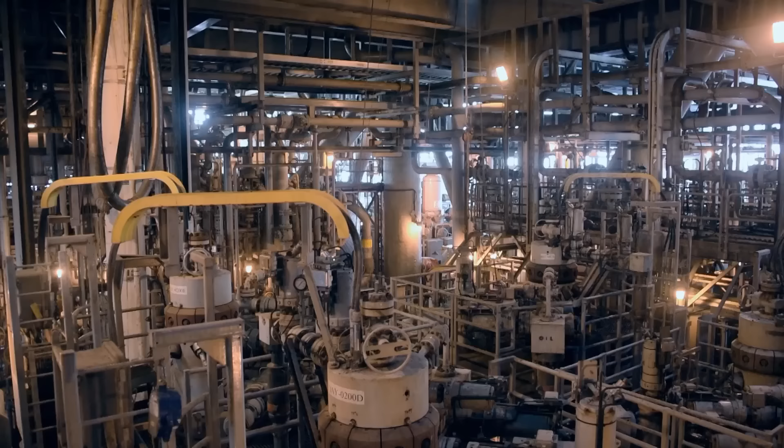In this episode, the world's deepest production and drilling platform. What we do is like the space program in the other direction. Pushing engineering frontiers further than ever before. These machines can easily work at 10,000 foot depths or greater.

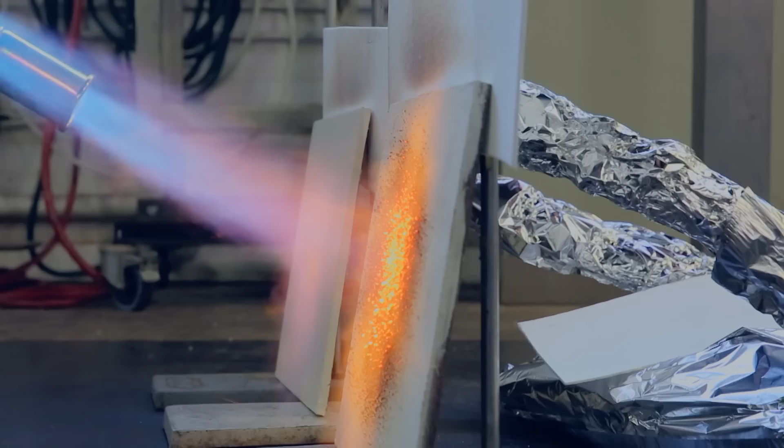And the groundbreaking innovators of the past. What once was the wall has now become the floor. So the intumescent paint now is charring due to a chemical reaction. That made the impossible possible.

Since the 1940s, the Gulf of Mexico has provided a vital source of energy for the US. Almost 2 million barrels of liquid fuel are produced there a day. And almost half of the country's entire petroleum refining capacity is on the Gulf Coast.

The importance of oil and gas in the world economy is paramount. I mean, energy makes the world go round. You know, ever since the invention of fire, that's what's driven our civilization and our economies forward. We're going to transition to whatever the fuels of the future are. In the meantime, oil and gas is a bridge to those new technologies and keeps us moving forward as a

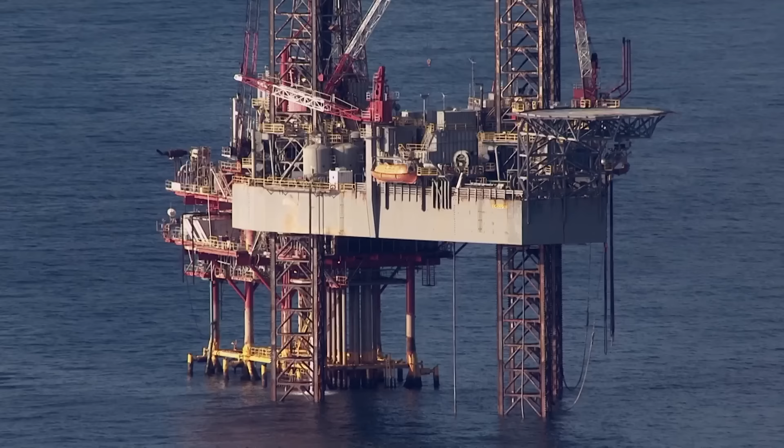human race. As the search for fuel in the Gulf of Mexico extends ever further and ever deeper, engineers face their biggest ever test. The challenge of accessing deep water reserves gets harder and harder. We're exhausting the supply or access to the easy barrels. And with every new discovery and development, it gets more challenging and it gets deeper. That's what causes us to push the frontiers of technology.

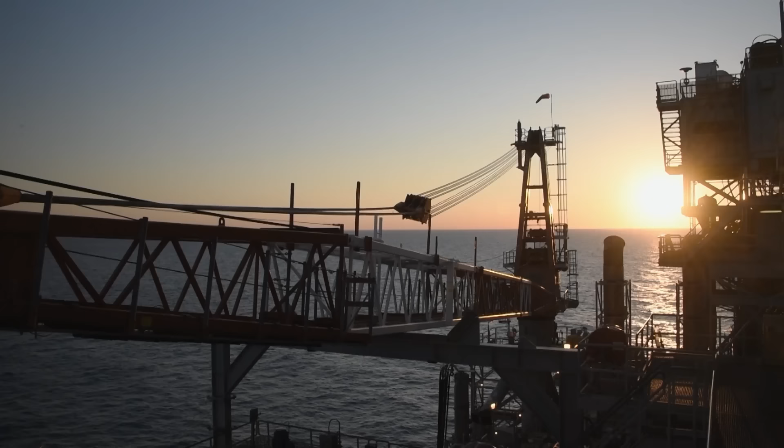300 kilometers from shore, at the vanguard of that engineering innovation, is the Perdido. The deepest production and drilling facility in the world. A $3 billion engineering colossus. The structure itself stands as tall as the Eiffel Tower, from the bottom of the Spar all the way up to the top of the drilling rig. And it's floating there in 8,000 feet of water, designed to accommodate hurricane-force winds, what we call the 1,000-year storm.

To give you a sense of how much Perdido contributes, one day's production from Perdido could power 500 cars for 15 years. At 55,000 tons, the world's largest floating production and drilling structure is anchored to the seabed by 9 3-kilometer-long steel and polyester mooring lines, where oil and gas from 35 newly discovered wells, some as far as 11 kilometers away from the platform, is pumped to the surface.

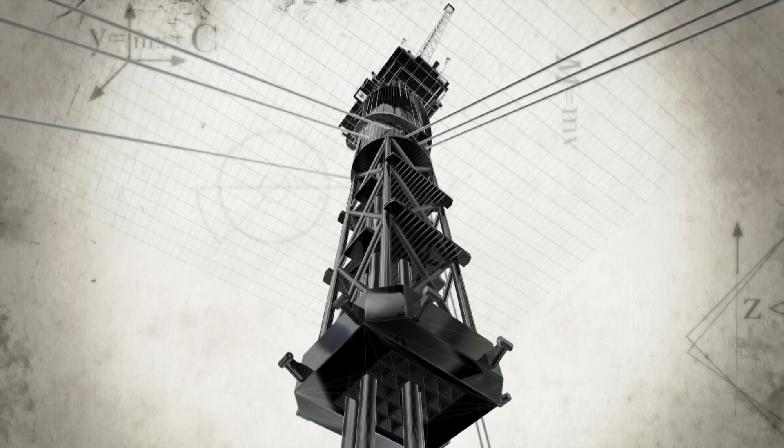A 170-meter-long, 36-meter diameter floating spar provides the base for the 3 decks where the oil and gas are processed. There's space for 2 helicopters, a restaurant, fitness room and cabins to house the crew of 150 plus that live and work on the record-breaking platform for 14 days at a time.

It's an engineering achievement once thought impossible. You were going into a frontier area in what we called the ultra-deep water. We were going in reservoirs that had not truly been tested before in new plays for the oil and gas industry in the Gulf of Mexico. You were going into one of the most severe environmental conditions as you can imagine in 7,800 feet of water. Making Perdido possible would take a giant technological leap.

Oil and gas fields wouldn't exist without the death of tiny plants and creatures. While dinosaurs roamed the earth, gazillions of dead plankton and algae built up on the seabed, before a crust of rock formed over the top. Millions of years of pressure and the Earth's heat essentially cooked this into an energy-rich soup. But getting to it under the water isn't always easy.

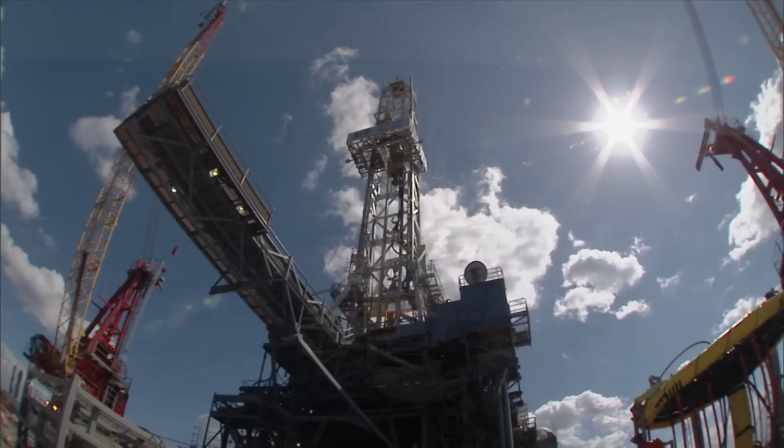Operating at a never-before-attempted almost 2,500-meter depth meant it would be impossible for Perdido to have legs like a standard oil rig. The reason we couldn't use a conventional tension leg platform was because the water depth was so great that those tension legs would be too heavy for any structure to be able to support. To find a futuristic solution, Perdido's designers would have to draw on technology pioneered in the past.

A clue to how the Perdido team have conquered the deep can be found in San Diego, California. Mechanical engineer Dan Dickerell is getting a rare opportunity to explore one of history's most unique vessels. In the early 1960s, the U.S. Navy was looking for a new type of research platform from which to take precise underwater acoustic measurements. Now, the submarines they'd been using previously were deemed unstable due to their shape. They would yaw in the water, making it impossible for the scientists on board to take the precise measurements they needed.

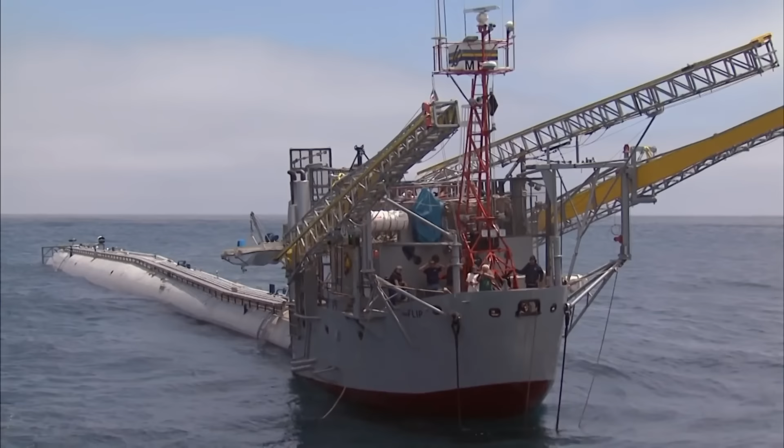Oceanographer and underwater explorer Fred Spiess was the man tasked with coming up with a solution. After months of testing various designs, Spiess and his team came up with this, the R/P FLIP, or Floating Instrument Platform. But FLIP earns its name in another quite extraordinary way. Believe it or not, FLIP is not sinking.

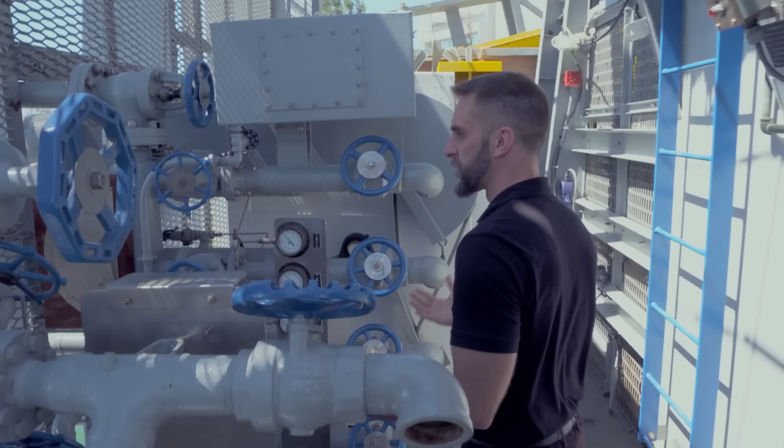It's one of a kind, a 108-meter long spar buoy that can go from horizontal to vertical in around 30 minutes. It's such a cool piece of engineering. First, the platform is towed to where it will operate. During the flip itself, everyone stands out on the outside decks. As the process occurs, the decks and the bulkheads exchange places throughout the horizontal to vertical transformation.

Most rooms on board have two doors. One for the horizontal orientation, and another door for the vertical orientation of the platform. Now, in the configuration it is right now, we're in the horizontal position. And imagine what happens when the flip occurs. What once was the wall has now become the floor. And what once was the floor has now become the wall.

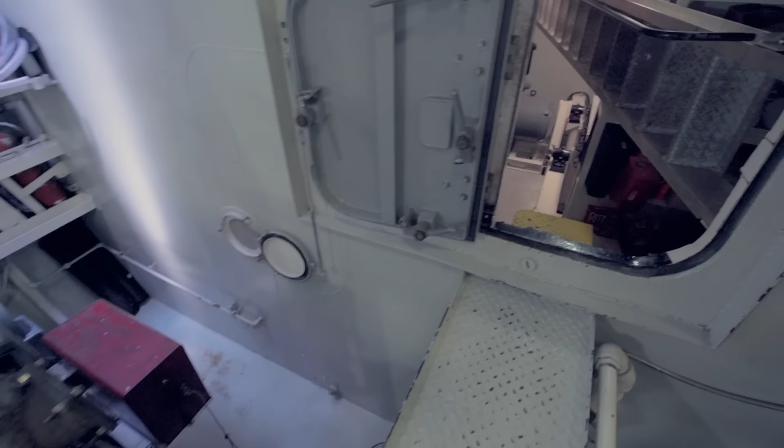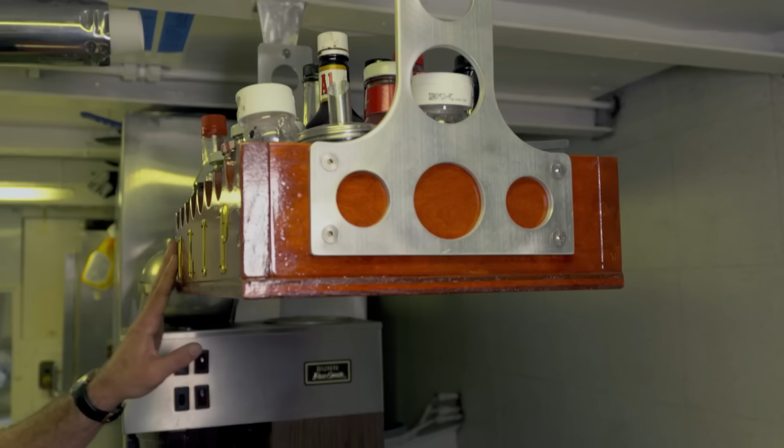Everything on the Flip is designed in two configurations. Look at this. It's a sink. It's a bathroom sink. But, oh, it pivots. How bizarre is that? From rotating condiment racks in the galley to tables on the walls.

To maintain its stable position in the horizontal, there are huge concrete blocks underneath what is now the floor. But when it's time to change and flip from horizontal to vertical, tons of seawater are pumped into those ballast chambers slowly. That changes it from horizontal to perfectly vertical. It's so cool. The science behind Flip is as simple as it gets. The genius behind how the Flip operates is its ability to sink in a controlled fashion.

Here I have a plastic bottle that's going to represent the Flip. Now, I've taped some washers at the bottom to help with stability when we make the transition from horizontal to vertical. If I place it in the water, we can see it floats in a horizontal configuration as we would expect. As I fill the bottle with water, we're going to have a transition from horizontal to vertical.

When flipped vertically, amazing stability is provided by the 700 tons of water ballast in the long spar sitting below the surface. It's so steady that Flip is capable of dealing with swells up to 25 meters high. And to rotate back to the horizontal, compressed air is simply used to force the water out, turning the platform back into a more familiar ship mode.

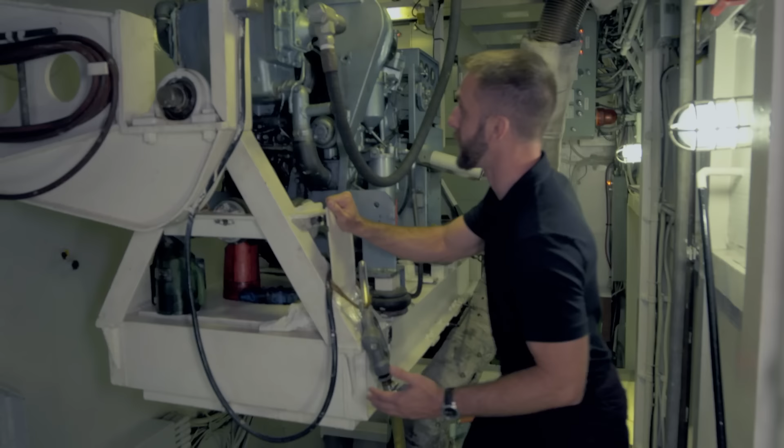These huge generators can also pivot by design. This is like being in a carnival funhouse. It's testament to the brilliant design of Fred Spiess that this amazing research vessel is still in use, more than half a century after it was launched. Oh, this platform is too crazy.

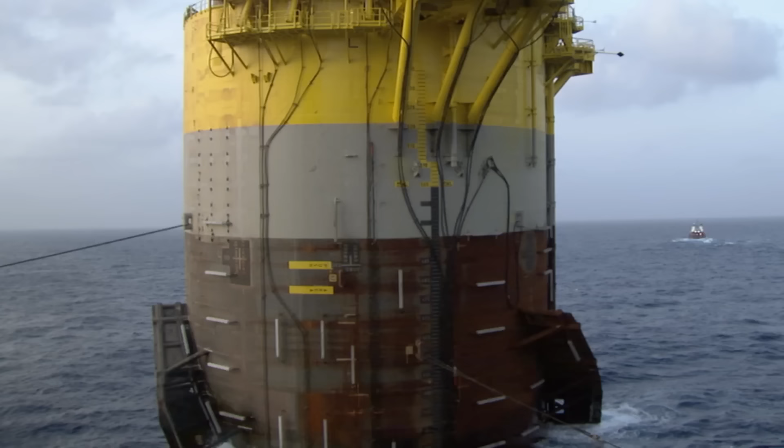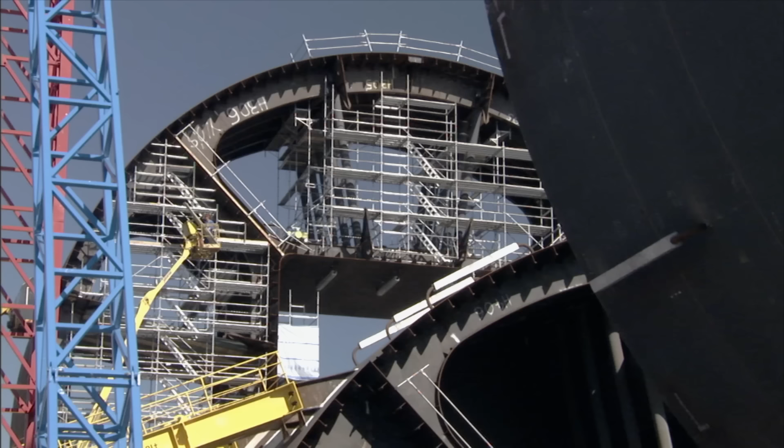In order to create a stable platform in depths of nearly 2,500 meters, Perdido's engineers take the principle behind the Flip and in 2006 in Finland, begin building the world's biggest floating spar. The spar itself is constructed quite ingeniously. It's done in slices. You cut it into slices. From the top of it, you do the can section, and then the truss section. And then it's welded together, slice by slice.

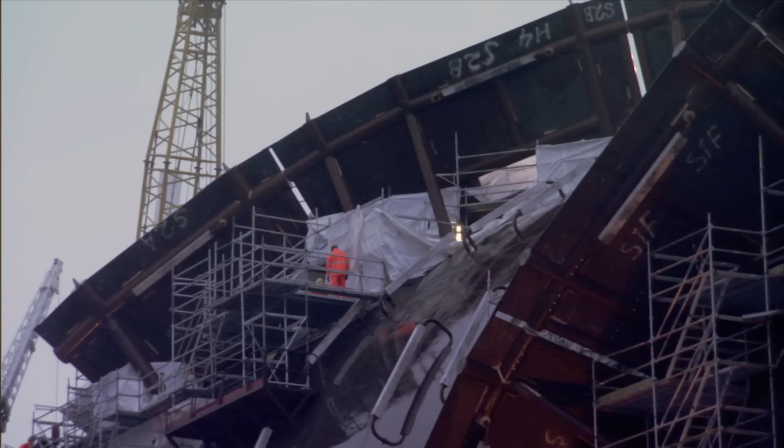Each of the 7 ring sections has 12 compartments, each self-contained. So if disaster strikes and a compartment is punctured, then only that compartment would take on water. On the end of the giant can-like section, an open truss of pipeworks and ballast area is added to complete the unprecedented structure. Perdido's spar is about 550 feet. In diameter, it's 118 feet.

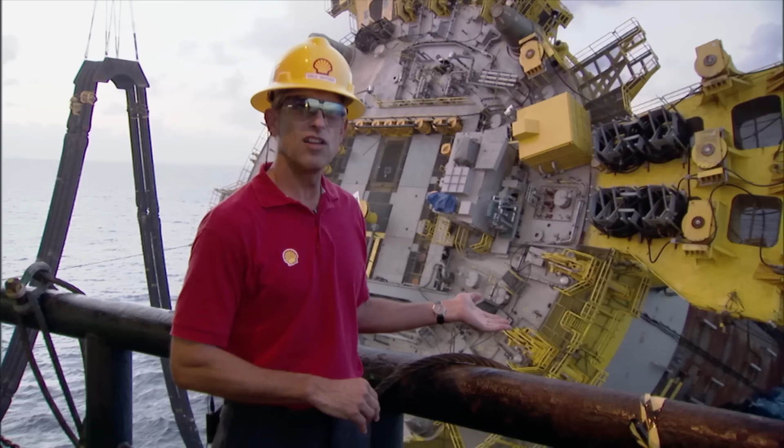In 2008, the spar is delivered to the Perdido site in the Gulf of Mexico. It's a key milestone for us because the spar is actually in its most vulnerable position when it's floating horizontally. So as soon as we can get it up to the vertical position, then it's in the position that it's designed to operate in, and it can withstand storms better.

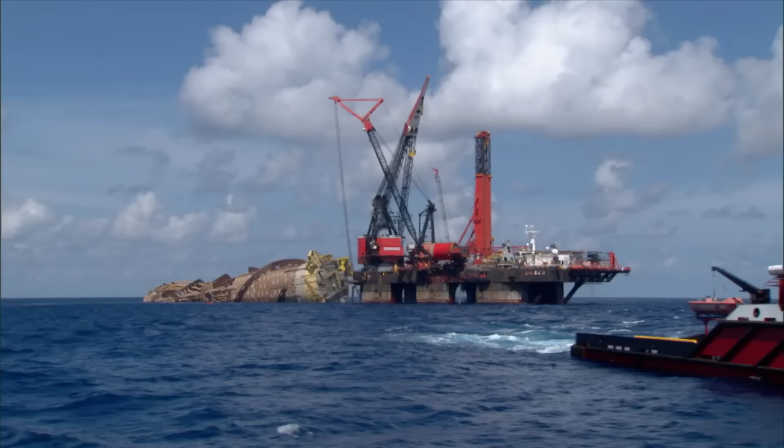Plugs are pulled to let in seawater. And then, like Fred Spiess's Flip ship, the spar slowly begins the process of switching from horizontal to vertical. So they also pump water into the tanks inside the can section, and that lowers it to give it that stability, to allow the pitch and the roll to stabilize.

Once upended, the spar must be secured, as storms or so-called tropical disturbances are on their way. We have a relatively long duration before we can get to storm safe. The first disturbance is predicted to be here within about 7 to 8 days. 9 supersized mooring lines must tether the floating spar to the seabed. A total of more than 30 kilometers of chain and rope.

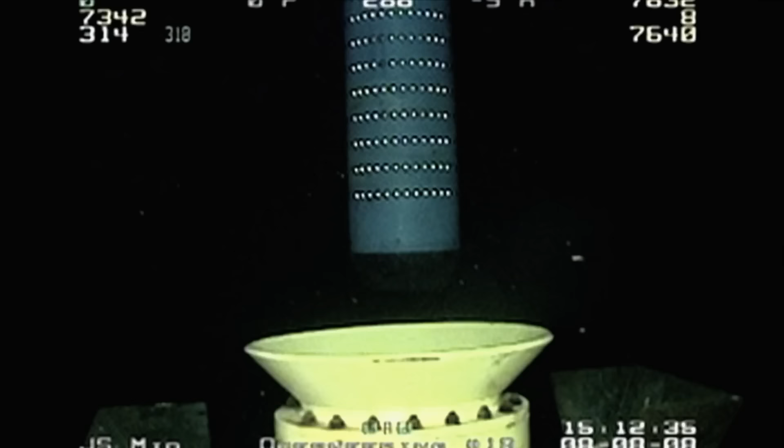So what we do in order to secure the structure floating on the surface is we connect the suction anchors on the seafloor with 2-mile-long, huge polyester mooring lines, about 25 inches thick, and about 300 meters of massive steel chains on either side of the mooring line. For maximum protection from storms, the lines fan out for more than 2.5 kilometers around the spar.

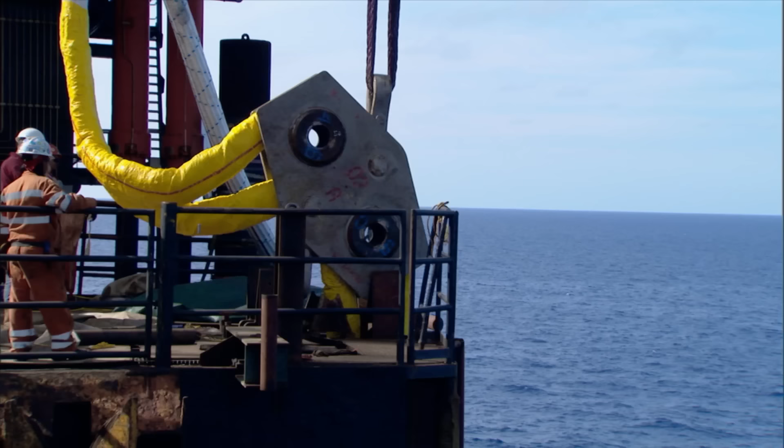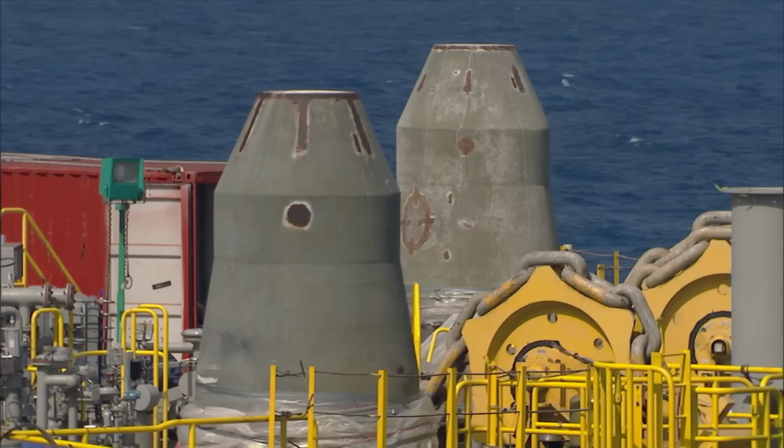Now it's still sitting pretty high in the water, so they put a weight in the bottom, essentially iron ore. They pump it into a tank at the bottom of that truss section, so you have a lot of weight at the bottom tank. With the additional weight in the mooring lines, the spar is storm safe.

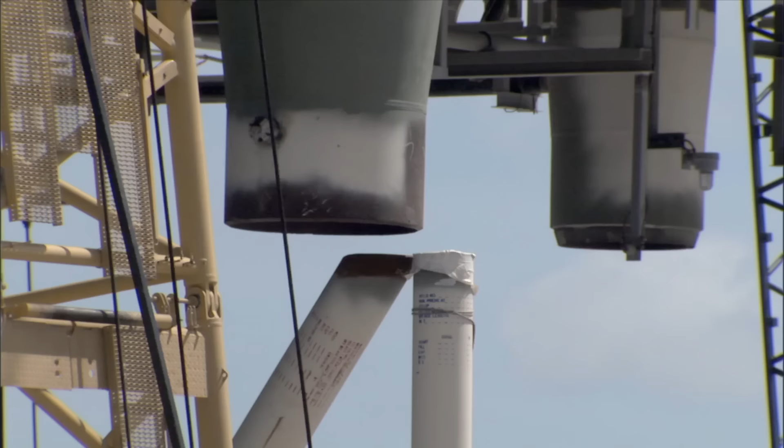But this is merely the beginning of the process of creating the world's deepest production and drilling facility. It was critical to get the topsides to be a certain weight because we wanted to do the topsides installation with a single lift. And its engineers will need to draw from more brilliant historical breakthroughs.

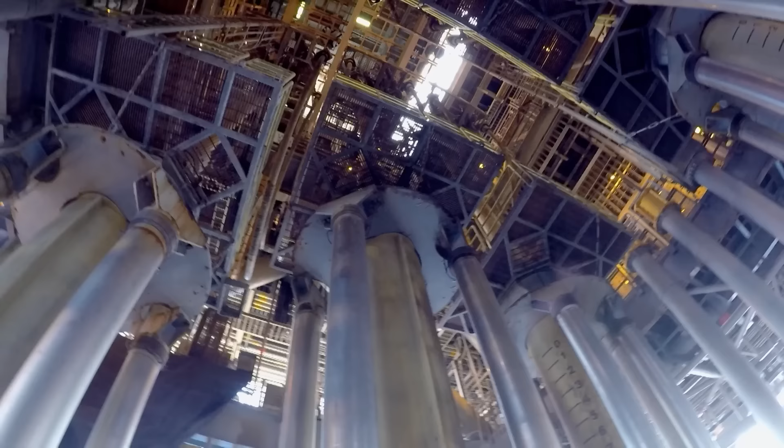300 kilometers off the Texas coastline in the Gulf of Mexico, the Perdido platform marks a new frontier in ultra-deep water operations. Moored in waters nearly 2.5 kilometers deep, the rig extracts oil from 35 wells across 3 brand new oil fields, producing 100,000 barrels of oil each day. Creating a rig like this calls for daring engineering.

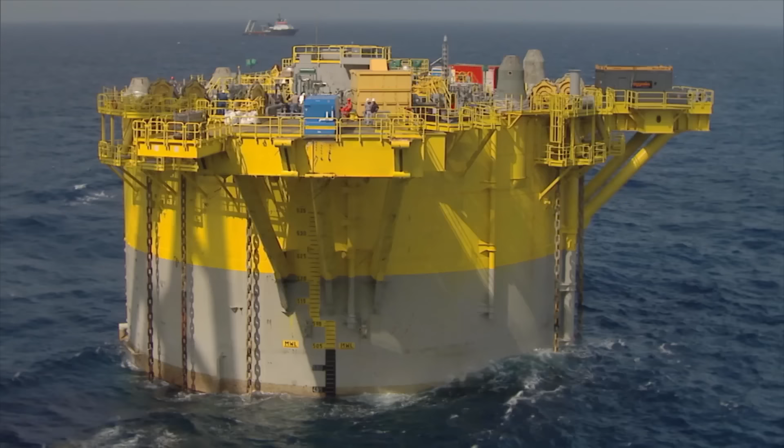Having anchored the world's biggest spar, the next step is fitting the all-important topside. What we call the topsides is all of the equipment that sits on the structure in the water that allows us to produce the oil and gas. It was critical to get the topsides to be a certain weight because we wanted to do the topsides installation with a single lift in the interest of doing it efficiently and safely.

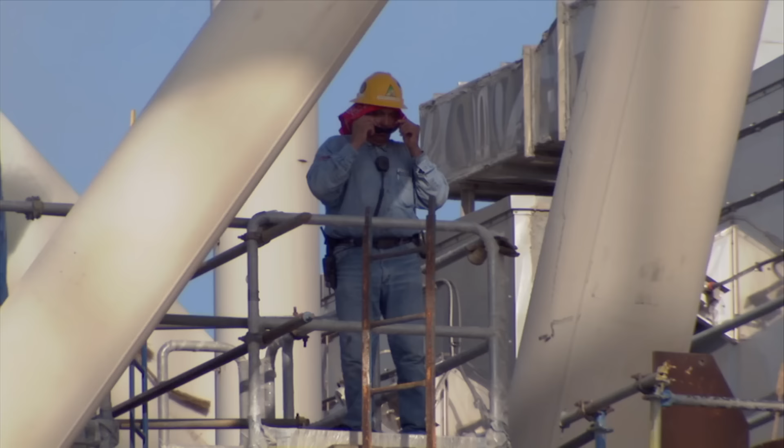Traditionally, these multi-story mega plants are assembled at sea, but a location as remote as Perdido's calls for a different solution. The topsides were constructed in Ingleside, Texas, and they were done 1 layer at a time, like a birthday cake, and there are 3 layers on the deck of Perdido. All that was done in the construction yard, and then you had a heavy lifting device that took that entire 3-deck layer and put it on a barge and shipped it offshore.

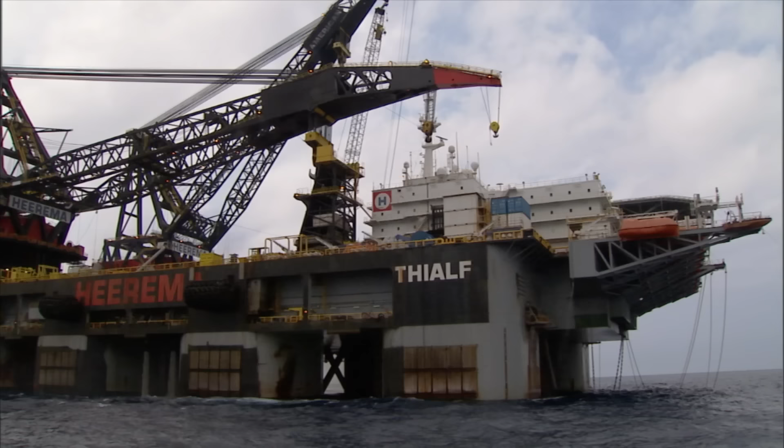With the final weight remarkably under 10,000 tons, in August 2008, the topside begins its journey deep into the Gulf of Mexico, where the giant crane vessel the Thialf is waiting to begin the biggest single lift ever attempted in the Gulf of Mexico. After 5 years of construction, this was the moment of truth, combining both spar and topside. Remember, these things are built separately, one in Finland and one in Texas, all by measurements, and all of a sudden, this is the first time these things better mate together. And there's a lot of very anxious moments as that crane is lifting that topsides onto that hull.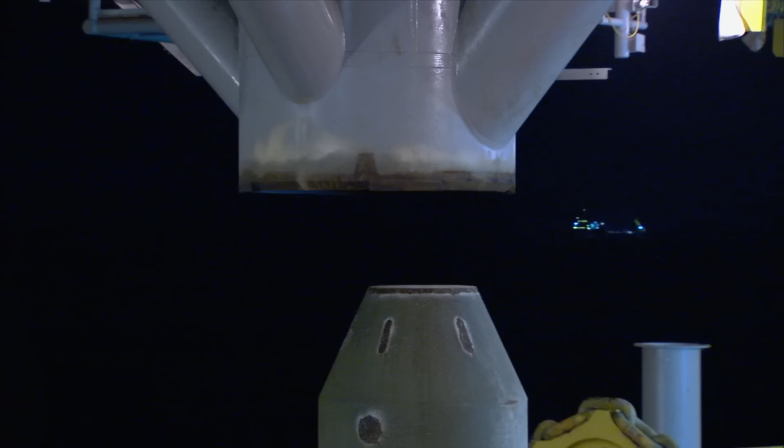As the lift begins, the topsides are pivoted into position, fitting perfectly. To see those pins go in, it's a wonderful feeling. And the spar settles into its new draft. With this mammoth milestone complete, the Perdido team must focus on installing production equipment on the seabed.

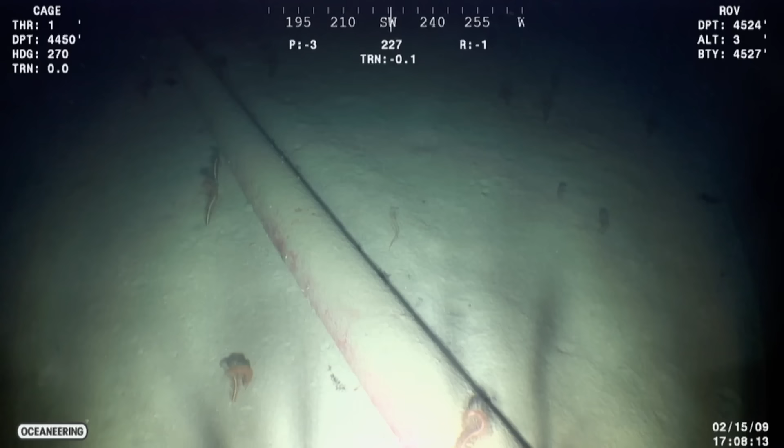But nearly 2,500 meters below the surface, with a terrain resembling a mountain range, it is a seemingly impossible working environment. The conditions at the water depth at Perdido, in 7,800 feet of water, it's an extreme amount of pressure. In addition to that, it's really, really cold down there. So you're talking temperatures in the order of 38 degrees Fahrenheit. So very, very cold, and there's no light. So it's very hostile conditions in terms of the pressure that we have down there.

With sophisticated deep-sea hardware needed on the seabed, physically interacting with it is impossible. You just can't get people down there. Yet a considerable amount of work still has to be done at these water depths. In an environment where even fish struggle to survive, how do you carry out some of the most advanced engineering work on the planet? It's a problem that requires another ingenious innovation from the past.

In the 1950s, America was at the forefront of developing nuclear power for peacetime use. Crucial to this movement was Chicago's vast Argonne National Laboratory. With special access, Professor Eric Lima has taken to 3 wheels to explore this extraordinary 1,500-acre site. It's very cool. Discovering how this era of hazardous research spawned a game-changing innovation.

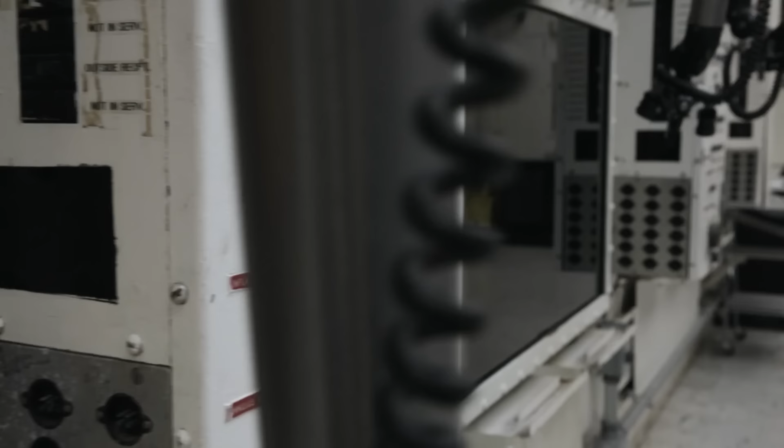This absolutely enormous laboratory was used to test the actual materials coming out of the reactors. Now, of course, those materials are highly radioactive. So how can technicians manipulate those materials without exposing themselves to radioactive contamination? That was the challenge. Toxic substances were initially handled through sealed glove boxes, but even these posed safety concerns.

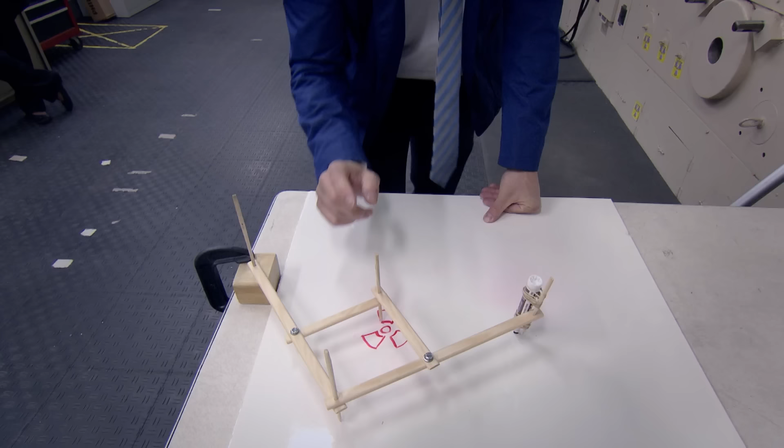To further distance scientists, engineers drew on a centuries-old technique based around a device known as a pantograph. The principle is a master-slave relationship. Now, this was developed in the 1600s, and what happens is that any movement of the master pen is transferred along the wood to the slave pen. And so you can trace diagrams, like I'm about to do with this radioactive symbol, and that tracing can actually be amplified.

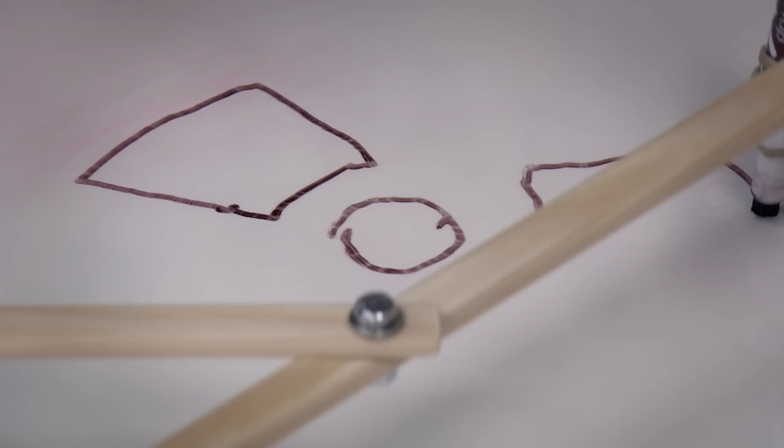And so here it is, the original and the drawing. Using this principle, early mechanical master-slave manipulators, MSMs, allowed technicians to transfer basic movements to a second arm from behind the safety of a glass wall. But their dexterity and strength was still limited.

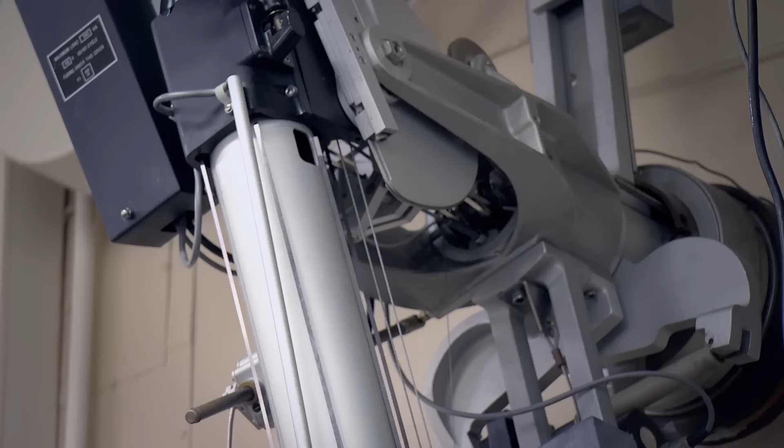In 1954, engineer Raymond Goertz looked beyond the purely mechanical, adding a motor to each arm, connected by an electric cable. And so what they would use are these incredible arms. And this is really cool. Look at this. On the other side of that glass, it does exactly what I do. And not only does it move back and forth, in and out, but check this out. Look at this. That arm right in there exactly mimics my actions. Cool.

And then it's actually a force multiplier. So I could pick up something very heavy, just like I was gripping it with my hand, and move it over. Well, look, there's another arm right there. I could use both of them. It's like right out of some cyborg thing. Whoa, it's making noises. That's the servo motors up there.

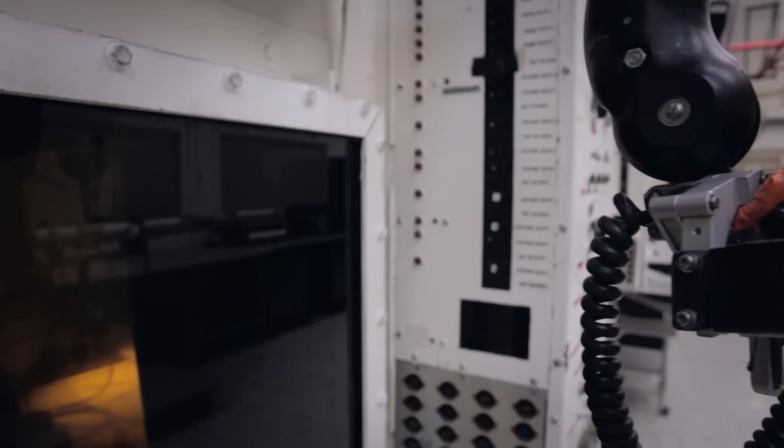The motors not only multiplied force, they also allowed the operator to feel the movements. Improved precision was matched by greater flexibility, and the electrical cable connection allowed engineers to separate the master and slave arms. Goertz was able to decouple the arms, and what that means is they can be as far apart and in any location that we want. So we could actually have the slave arm coming up from the floor or coming at some weird angle to get us right where we want it to go.

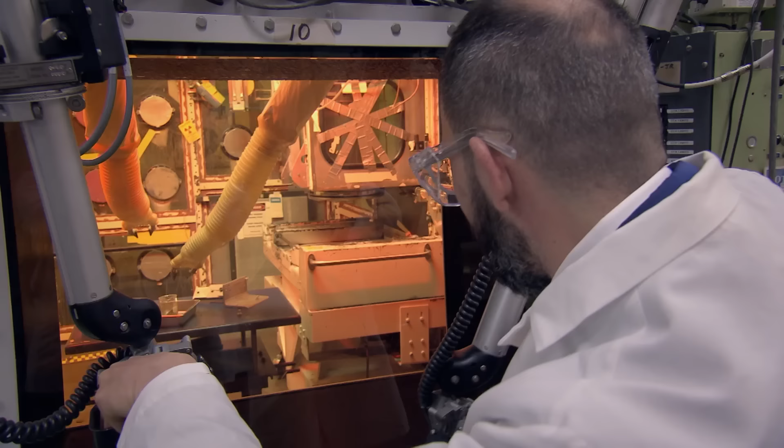Over the following decades, Goertz's remote technology was further finessed, producing a series of telemanipulators that combined safety with robotic precision. Woo! If in the right hands. Whoa! As you can see, it's not as easy as it looks. So thanks to Goertz and his work at Argonne National Laboratory developing these telemanipulators, we are able to go as humans in places that we've never been able to go before.

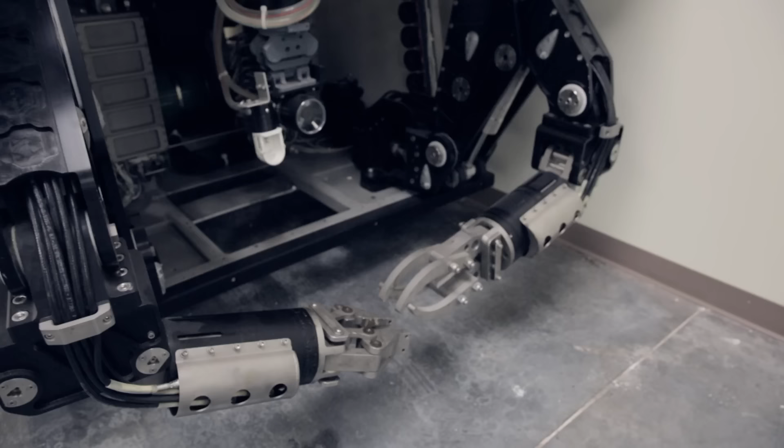Resembling a scene from a sci-fi novel, engineers at Perdido are using telemanipulator technology to work at depths that were once thought impossible. This fleet of remote-operated vehicles, or ROVs, sweep the ocean bed that lies almost 2.5 kilometers beneath the platform. This is exactly the type of ROV that we would use on Perdido. This is a 1,000-pound thrust machine, and one of the main reasons we use them is simply because below about 600-foot water depth, it gets really, really dicey, really, really risky to have humans at those depths. These machines can easily work at 10,000-foot water depths or greater, and we can always get them back, and they never get hurt.

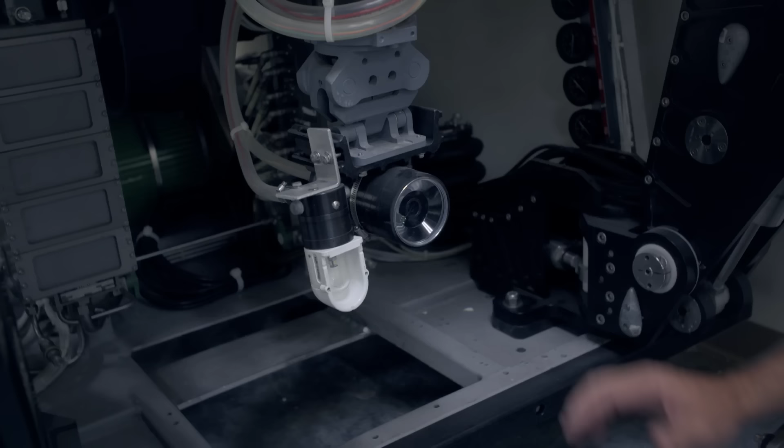These sub-aqua robots are equipped for serious work. These are our hands to actually connect and attach all the different equipment we need. And here is our eyes. This high definition camera is how we see what we have going on down there. A leap forward from Goertz's telemanipulators, these ROVs can be operated via a joystick using a fly-by-wire system that originates on board the rig.

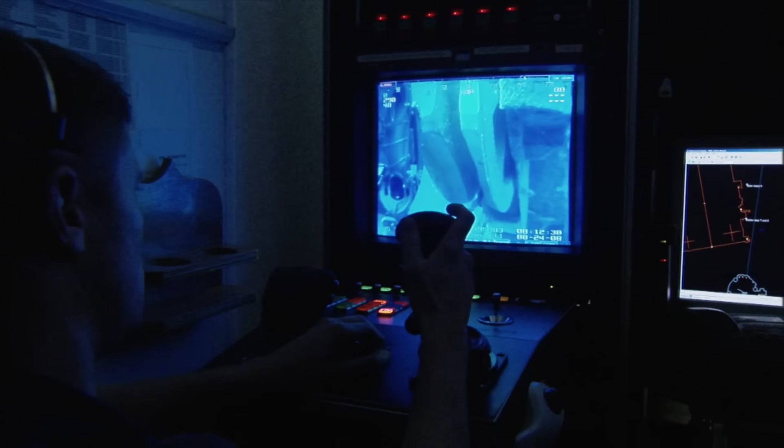The way these machines operate, they're actually tethered back to Perdido. There's actually an umbilical line that runs the entire water depth, all 7,800 feet. And from there, there's an additional 600 feet or so of umbilical that allows the ROV to fly out on excursions and move about the well pattern to go from one well to the next so they can survey the entire subsea system. Installation, drilling, and maintenance can all be achieved remotely.

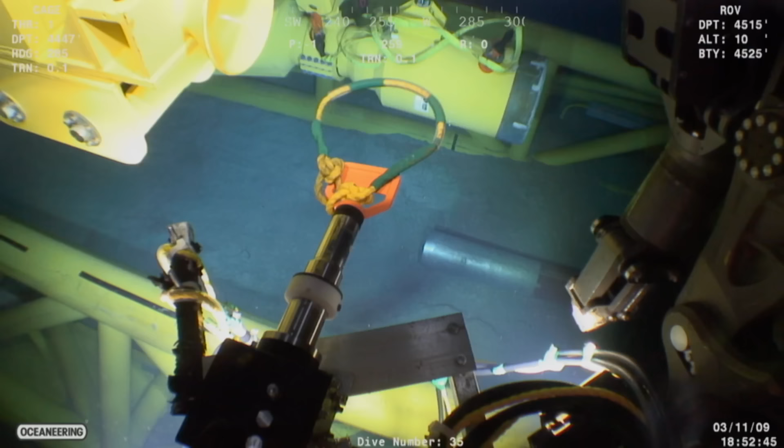But there was one ROV-driven task that would be the crowning glory of Perdido's success. So you're 150 miles offshore of the coast of Texas, and you had to get that oil and gas back to the beach. Most of the oil pipelines that you have in the Gulf of Mexico start in less than 5,000 feet of water depth. So we had to connect from Perdido's location to oil pipelines and gas pipelines that are further up in the shallower water.

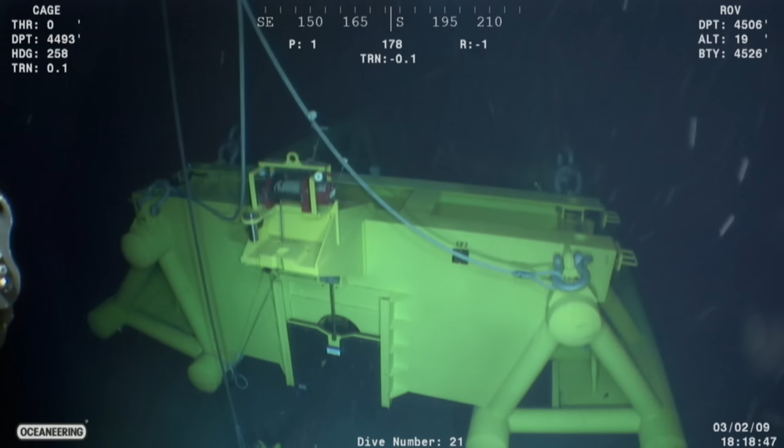Connecting to a live export line at these depths had never been attempted. The pipe must be cut and connector installed with millimeter precision. And at nearly 1,500 meters, it was completely out of human reach. Over a 2-year period, the Perdido team designed and rehearsed an ROV-driven system. When they eventually made the attempt, it worked perfectly. To be able to do all that with remote-operated vehicles, and the water depth that they did that at Perdido, was world-class, never been done before.

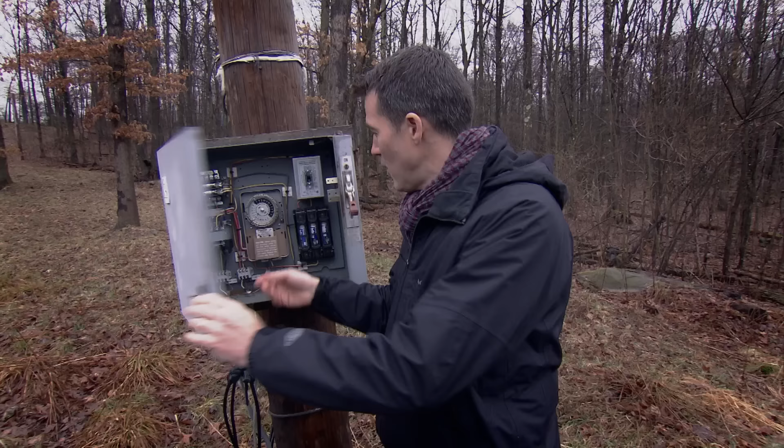The Perdido platform is the deepest offshore production and drilling facility ever built, and has pushed the boundaries of offshore engineering. This deep-sea hub has 22 wells directly underneath its structure, and its reach is far greater. A further 13 wells across 3 oil fields, transporting crude through nearly 300 kilometers of pipeline web.

But creating ultra-deep offshore wells is no easy task. So when you're offshore, drilling's a little bit different than if you're on land. In Perdido's wells, the total well depth was somewhere around 17,000 feet. But almost half of that, 7,800 feet of it, was just the water column.

Not only are the reservoirs ultra-deep, they sit in a previously untapped ancient rock layer. We were pushing the boundaries of not only technology, but actually a new frontier in terms of the geology of what we were tapping into. And there was a lot of excitement, uncertainty around how it was going to produce.

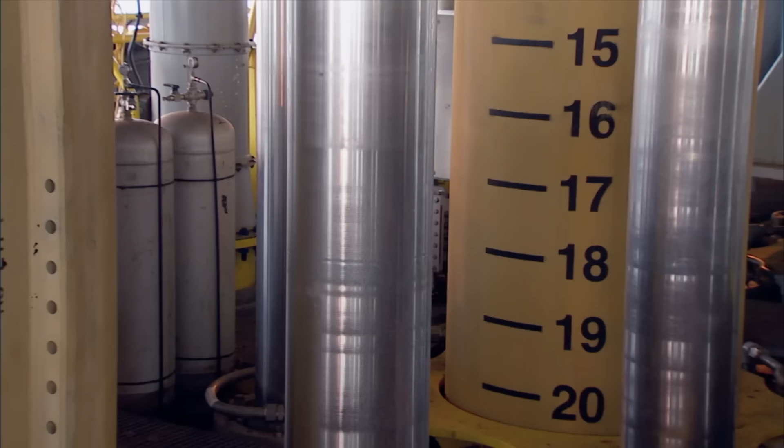Each new well must be drilled with precision, keeping the water out and the oil in, or the project and the environment will be permanently damaged. To find a solution, engineers must look to the pioneers of the past.

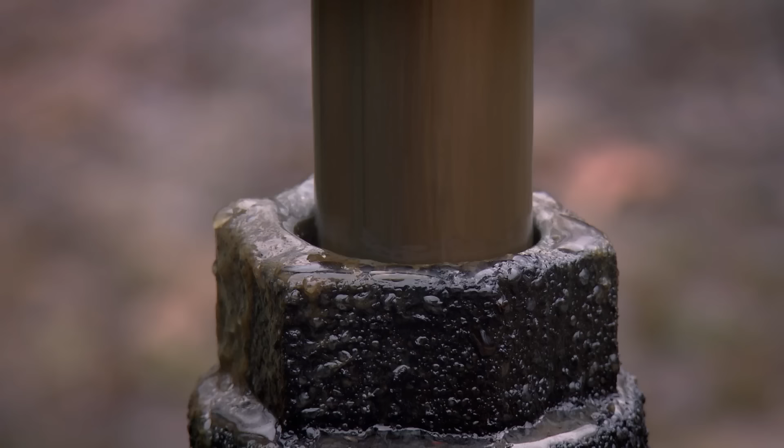Andrew Smith has come to Titusville, Pennsylvania, to discover how one man's inspiration paved the way to black gold. The moment I flip this switch, something very exciting is going to happen. Here it comes, you can see it. Pennsylvania crude.

Before the mid-1800s, salt brine was the area's biggest commodity. But efforts to extract it from the ground were blighted by another substance, a smelly black goo. To begin with, oil was touted as a medicinal product, capable of curing burns, cholera, asthma, indigestion, and even blindness. But its smell and its healing properties were questionable. But the real breakthrough was when it was discovered that oil could be distilled to burn as fuel for lamps.

Sensing a fortune, engineers needed to get the oil out of the ground fast. It was here, in the small town of Titusville, that the hunt for oil took off at a scale never before seen. And all because of one man's simple innovation. In 1859, railway worker Edwin Drake gambled his life savings on a small stake of the newly formed Pennsylvania Rock Oil Company. Drake, as a stakeholder and now employee, was sent here to this very site where he began his search for oil. But early attempts were met with mixed results.

So at the time, the practice in drilling was to use something called percussion drilling, where the drill is just hammered down through the soil until you reach your oil. Drake had some success with his technique, but Titusville's water-sodden ground was scuppering his plans. As you withdrew the drill, the problem would be that the water would rush into that space and contaminate the oil he was trying to pump out.

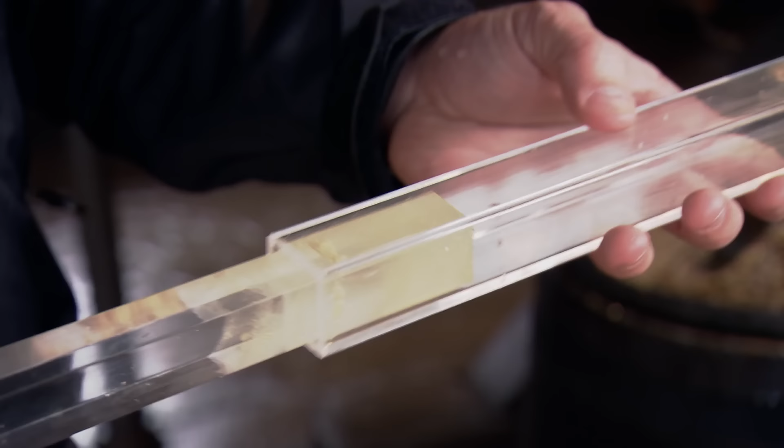To overcome this problem, Drake and his assistant Billy Smith came upon the idea of connecting lengths of cast iron pipe to encase the freshly dug hole, preventing the ingress of the water. With the cast iron pipe in place, they continued to drill through this now watertight space, through the ground, the bedrock, and down to the oil reservoir. After drilling 69 feet, they waited. Overnight, it happened. Clean oil had risen up through the pipe to a point which it could now be collected. Drake's plan had worked.

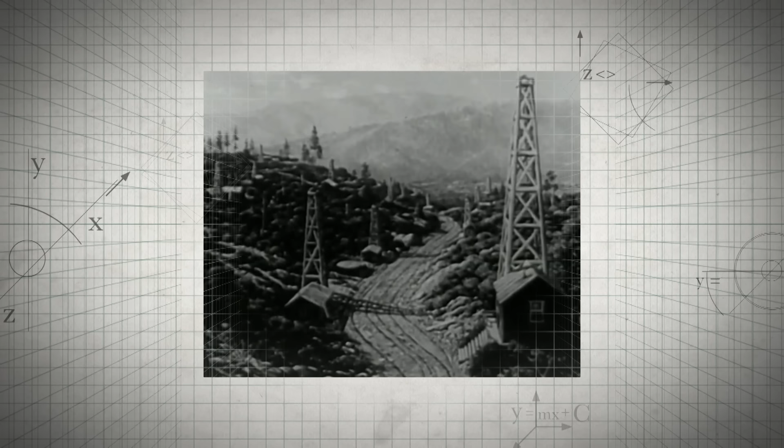By the following year, oil wells using Drake's innovative technique had sprung up all over the region, producing several 100,000 barrels. The nation's oil bonanza had begun, and huge fortunes would be made from what was once a smelly goo that was simply a nuisance.

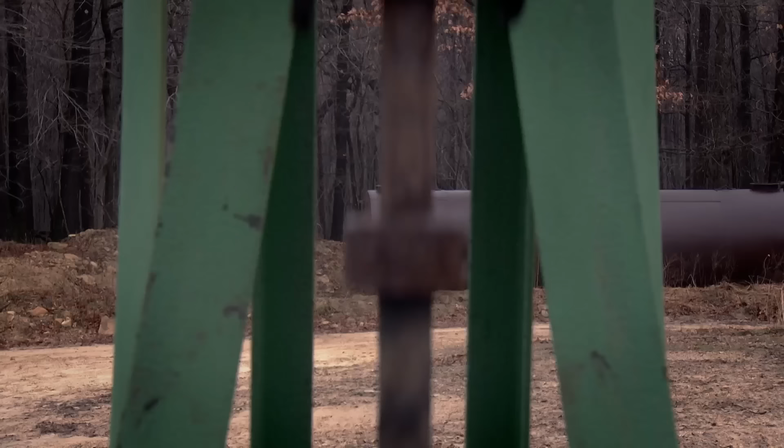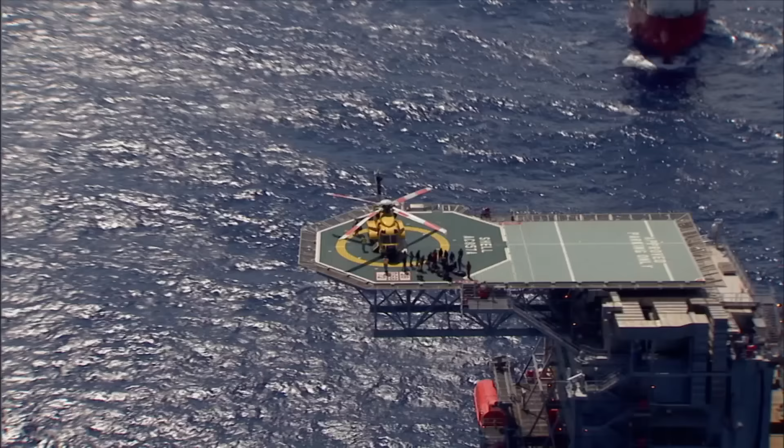In order to drill to unrivaled depths, Perdido's engineers have taken the principle of Drake's system 350 kilometers offshore. And like that first well in Titusville, one thing is crucial. The processes for drilling are designed around keeping the oil in the pipe. So you start with big diameter pipes, and as you go deeper, you get smaller and smaller concentric sizes of pipe.

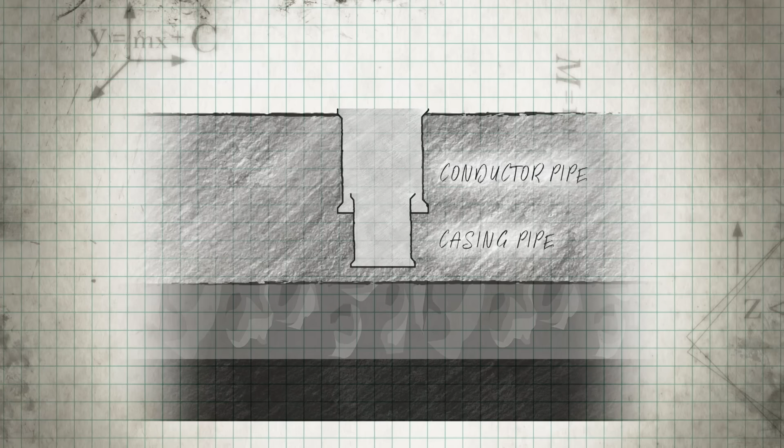To begin, a hole's drilled for a conductor pipe. Another drill then bores a few hundred meters before a casing pipe is installed. This is followed by a smaller drill and casing, and the process is repeated until the reservoir is reached. But with a seafloor in part like the landscape of the Grand Canyon, being able to hit your target with the drill is no easy task. Most of the locations that we have to drill are quite far away from the rig, and we have to use directional drilling techniques in order to get there.

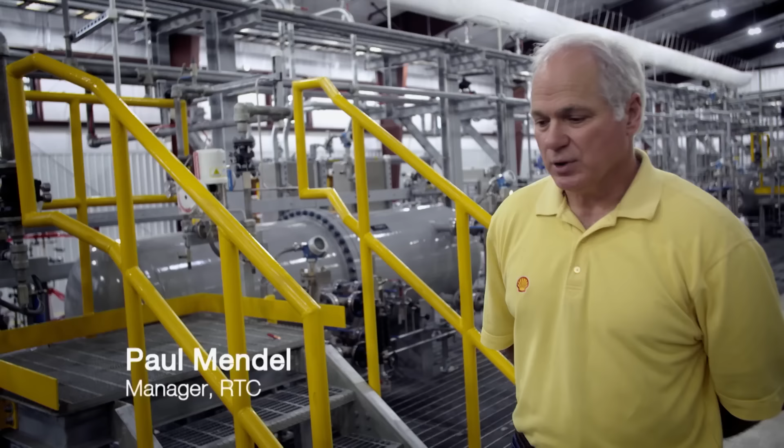But for the engineering team, perhaps the biggest challenge of all is lifting the crude oil up these risers to the surface. The reservoirs are low pressure, lower than you normally would find in the Gulf of Mexico. That required us to add energy to the system in order to get the produced fluids up to the surface. To do that, we had to pump. We had to use electrical submersible pumps. Well, these pumps don't like gas.

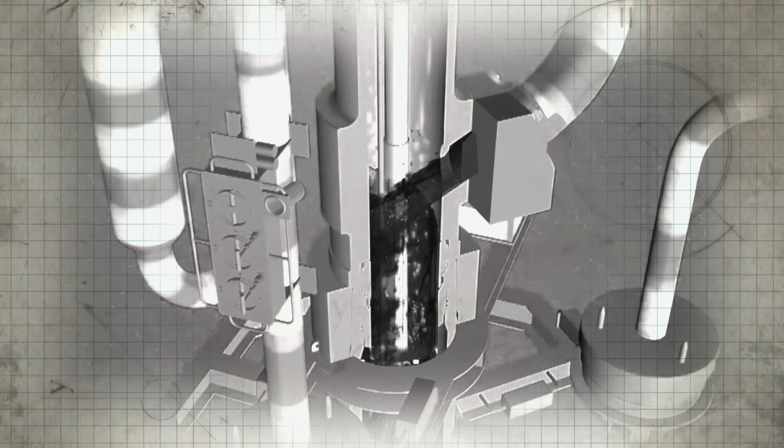Normally, the gas, oil, and water are separated on the surface. But to bring Perdido's oil to the platform, engineers must remove the gas at source, 2.5 kilometers beneath on the seabed. At the base of each riser, a unit separates the components. The gas naturally ascends, and the liquid is pumped to the surface. The engineering leap for Perdido was really in two areas. One was the depth of the water in which we were working. The other, and more significant, was first ever subsea processing.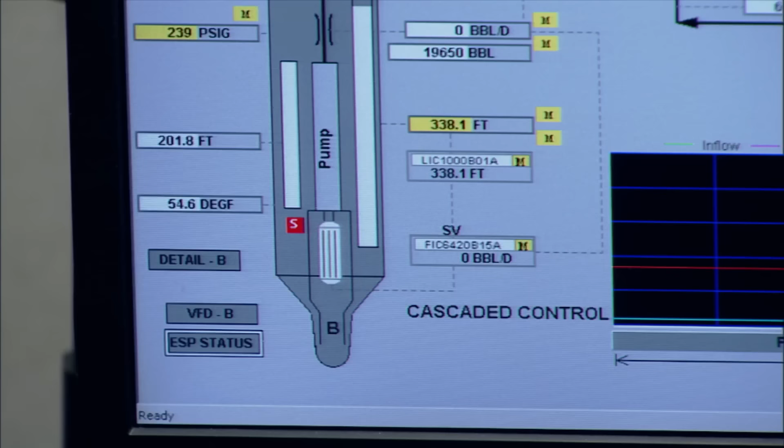After decades of innovation, in March 2010, the moment of first oil from the world's deepest offshore wells arrives. We're all piped in via camera to the guys who are actually offshore doing it. And then you start watching the pressure in the pressure gauges. And you see the pressure start falling, meaning that it's starting to flow. It's been a long road, boys. You know, you've just done something that, in Perdido's case, nobody had ever done before. We were pumping and separating on the subsea floor from day one, and it all worked, and you know, that was incredible.

Perdido's engineers are succeeding in producing oil from deep within the Earth's crust. But to ensure this operation remains safe, engineers need to look to the past. So the intumescent paint now is charring due to a chemical reaction and swelling and turning into a thick char. To create more impossible engineering.

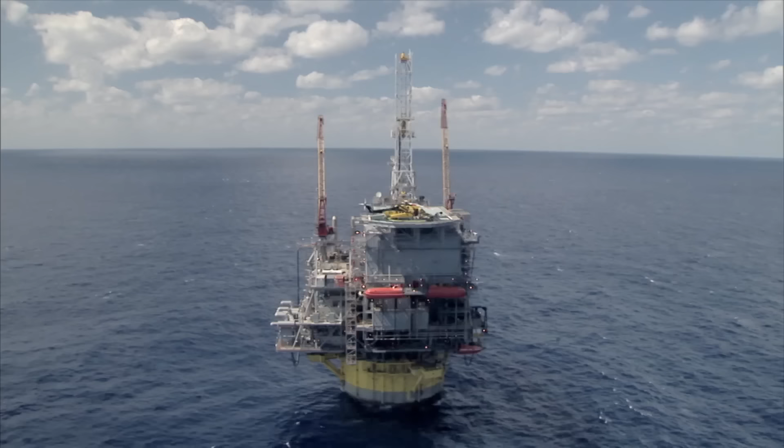In 2010, the Perdido oil platform began production, making it the first of its kind to operate in ultra-deep water depths of almost 2,500 meters. A team of 172 workers spend 2 weeks at a time extracting enough oil to fill more than 6 Olympic-sized swimming pools each and every day.

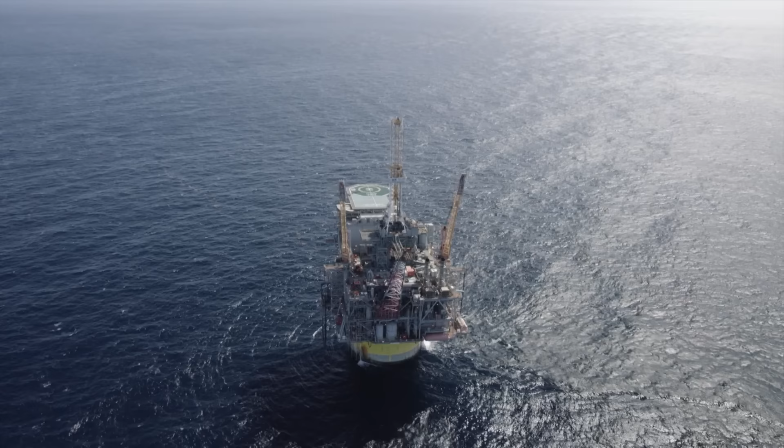As you fly up to Perdido, it's 200 miles away from the coast. There's pretty much nothing around it. And it's almost a 2-hour flight on the chopper. And as you get into the range of where Perdido is, you see this monument to what's possible out in the middle of nowhere. And it's really satisfying to land on that and see what we've accomplished.

Perdido's isolation creates logistical challenges. It's a 24-hour boat journey. So whilst much of the resupplying happens by ship, the fortnightly turnover of staff needs to be carried out by helicopter. We're flying these really large helicopters like this S-92 you have, which can hold up to 19 passengers, although we'll fly it with about 15 or 16. In the event that helicopter goes down, that's a lot of people that we need to take care of.

The Robert Training Center in Louisiana is where Perdido staff, along with other oil and gas workers, are trained for worst-case scenarios. So we're training these people how to safely egress that helicopter should the unfortunate happen. In case it does go into the water, we want them to be able to get out of the helicopter and wait for rescue.

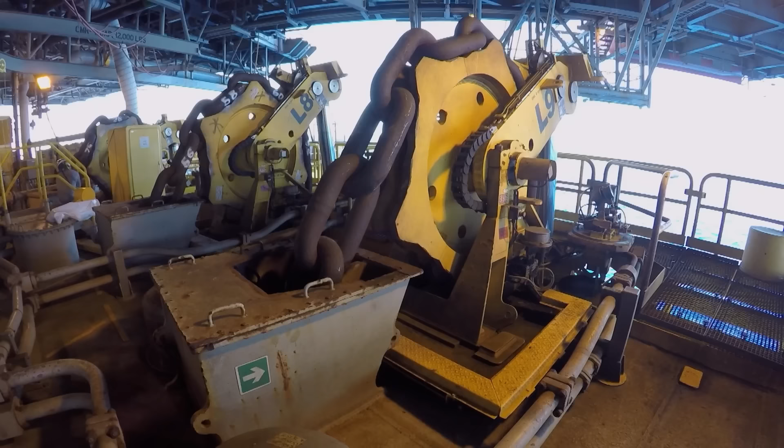But when you're potentially processing more than 100,000 barrels of oil a day, one hazard above all others is at the forefront. Fire protection on an offshore installation is of paramount importance. We design for safety. It's the #1 thing we have to get right. The worst thing that could happen on a rig or production facility in the event of a fire is it gets out of control. It gets to be very large and very catastrophic. In that event, we're going to abandon the facility. We're going to put people in lifeboats that they've been trained to use, and we'll put those lifeboats in the water and get people away from the fire and abandon the platform.

Fire isn't just a hazard for the workforce. A hydrocarbon blaze can reach such high temperatures it has the potential to deform or destroy even solid steel. As we become more complex and remote with these types of developments, the safety systems that we need in order to support them become ever more critical. So, how can you protect Perdido's vast surface areas against the threat of extreme heat? The solution, surprisingly, has its roots in historical show business.

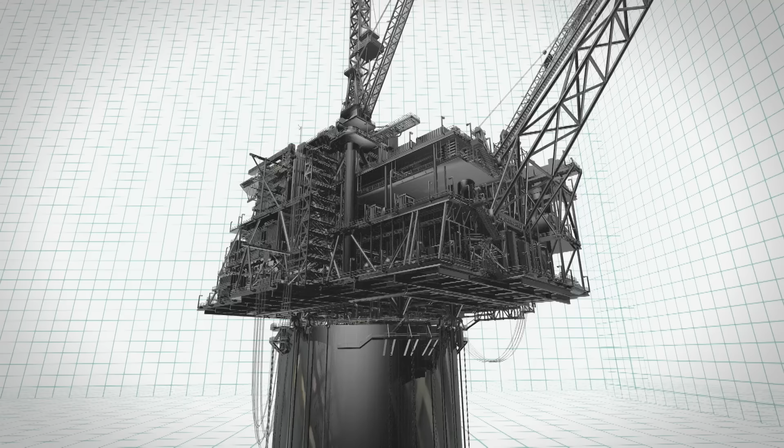If, hundreds of years ago, fire safety expert Luke Bisby visited a theatre like this, he might have been taking his life in his hands. Because oil lamps were used for lighting, curtains and fabrics were frequently set ablaze. In 1821, French chemist Joseph Gay-Lussac was tasked with fireproofing France's theatres following a string of tragedies.

Gay-Lussac set to work trying to find an invisible, non-toxic compound that he could use to coat fabric, curtains, and scenery. He began experimenting with borax, a compound now used in detergents and cosmetics. And to demonstrate how effective it is, I'm going to do an experiment. Here I have a stage, and it has two curtains. One of them has been soaked in borax solution, and the other one is just normal fabric. So let's see what happens when I light them.

And you can see that the curtain on the right-hand side is burning quite vigorously, whereas the one on the left, you can clearly see the effect of the borax, which is helping the curtains to prevent flaming. I mean, I'm impressed, and I'm a fire safety person. The borax helps form a protective layer of char, which acts as a buffer between the fire and the fabric.

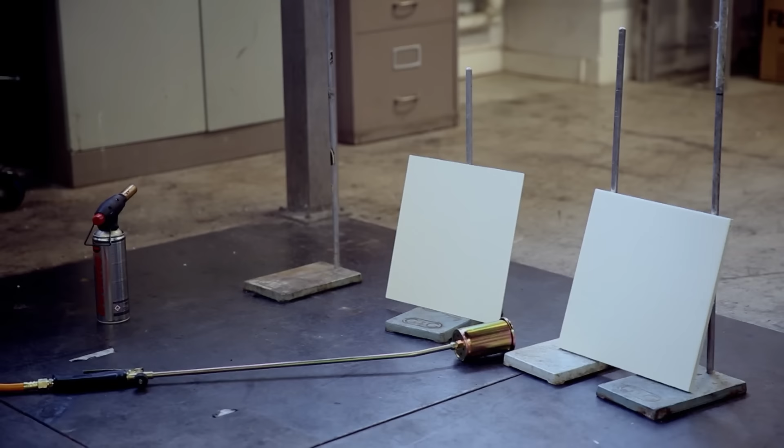And this charring effect pioneered by Gay-Lussac is used in modern fire-resistant intumescent paint, as Luke is going to put to the test at Edinburgh University's Fire Lab. And what we're going to do is subject these two steel plates, which are identical to each other, to the heat from the flame. The plate on the left is coated just with a household emulsion paint, and the plate on the right is coated with a fire protection intumescent paint. All right, so here we go.

So the intumescent paint now is charring due to a chemical reaction and swelling and turning into a thick char. As with Gay-Lussac's borax coating, this charring looks dramatic, but temperature monitoring reveals just how effective it is. So we've now been heating for about 2 minutes, and I can see that the temperature of the plate with normal paint is at 350 degrees Celsius, and the plate with the intumescent paint is still at less than 100 degrees Celsius.

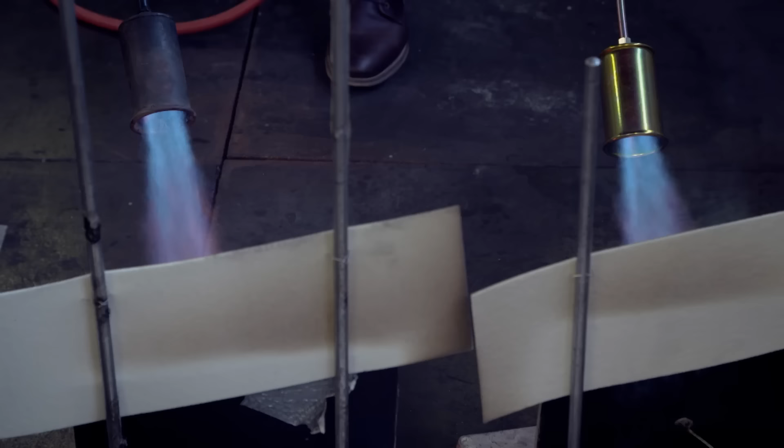As the intumescent paint's chemical reaction accelerates, expanding bubbles continue to insulate the plate's surface. On the left-hand side with the regular paint, the temperature got up to above 500 degrees Celsius, whereas the intumescent paint remained about 100 degrees Celsius, so a massive amount of thermal protection for the steel. While it's visually kind of ugly, it's exactly what we wanted to see happen.

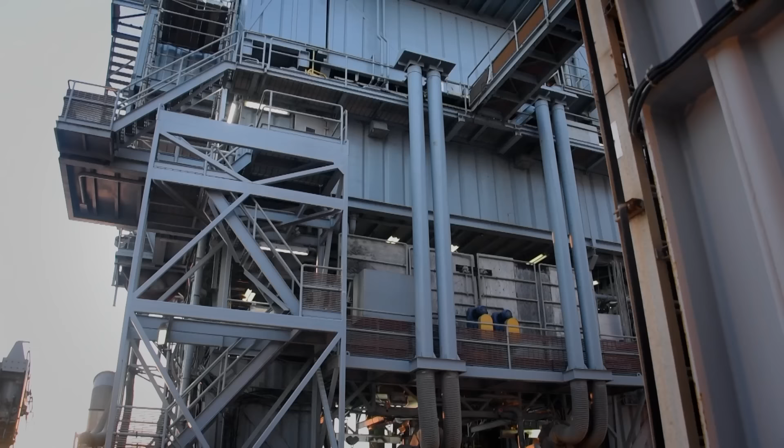In the Gulf of Mexico, the Perdido oil platform has its key components coated in an intumescent paint product born out of the space race. First developed as a protection for spacecraft facing the extreme temperatures of re-entry, it can withstand heats of up to 400 degrees Celsius for up to 90 minutes, along with protecting the rig from saltwater corrosion.

So intumescent paint that we've used on Perdido, it's an epoxy coating on the steel, and if it comes into contact with heat, it'll form a charred layer, and that'll provide a heat barrier between the fire and the steel itself. So the intumescent paint system buys you time to either fight the fire and get it under control, or protect people to the point where if you need to get off the platform and evacuate, you've got that time.

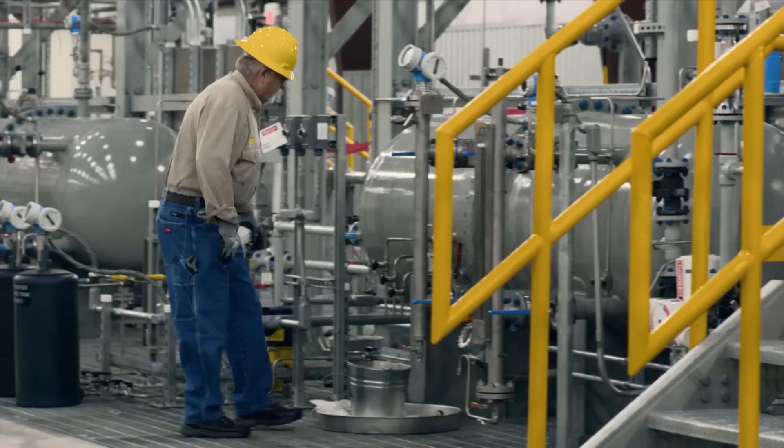Above all, the platform and its workforce are geared up for stopping the fire breaking out in the first place. What we do to train our people to combat a fire, it starts with prevention. It's always about prevention, just like you learned in school. Prevent the fire to start with. We do lots of things and work very, very hard to prevent fires from ever starting. We have a ton of monitoring equipment out there to always be on watch 24 hours a day, watching for fires or potential sources of fires like a gas leak.

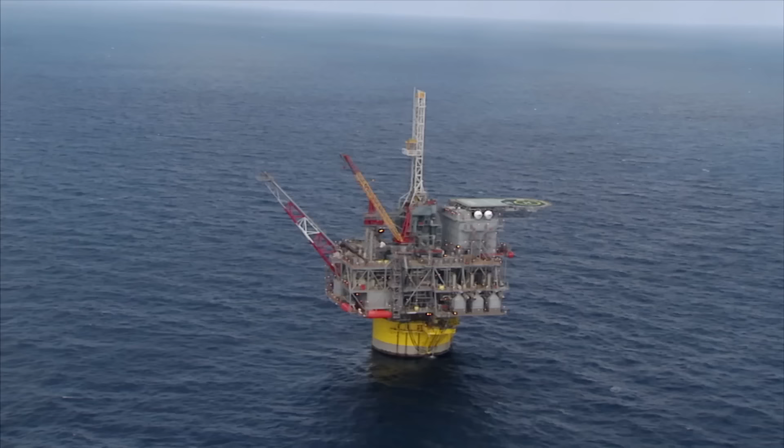Perdido is covered by hundreds of sensors and alarms and is fitted with twin 5,000-gallon-per-minute firewater pumps and an automatic foam system that covers the entire platform, including the heliport. All designed to protect the environment, the workers, and this remarkable engineering pioneer. It's more than a century since man first dared to attempt offshore drilling. Now, in 2,500 meters of water in the Gulf of Mexico, a new generation of bold engineers have written the Perdido platform into the record books.

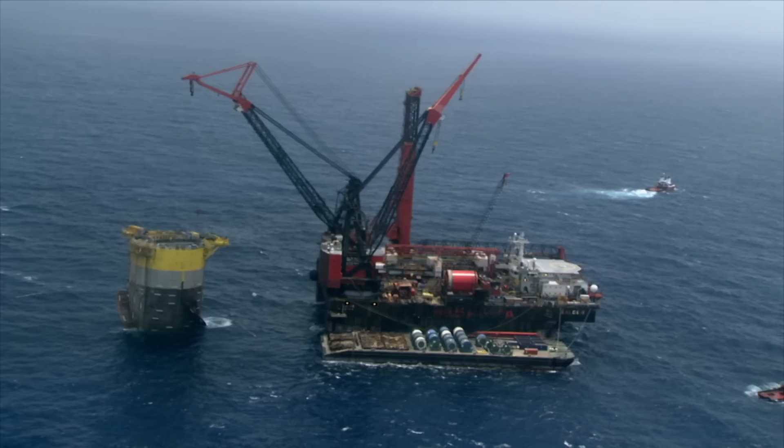For me personally, that was the single biggest project I had ever worked on. And I'd worked on some good projects, but I have tremendous pride in what we did with Perdido. I think everyone who worked on that project team feels they had done something in the oil industry that had never been done before, and really set the stage to move into ultra-deep water.

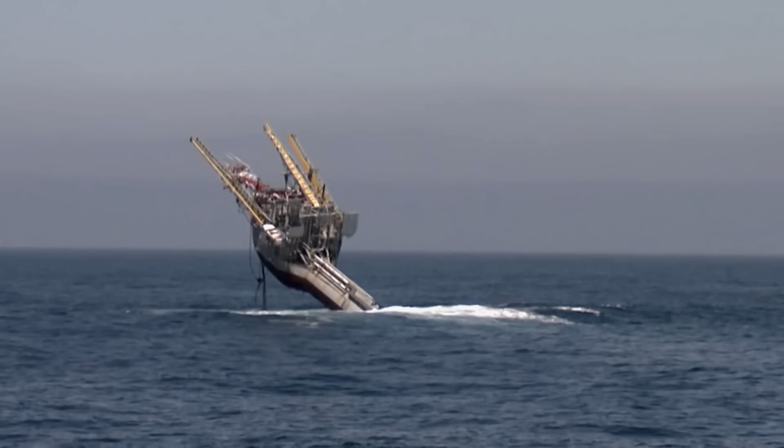By taking history and turning it into high-tech, the team behind the Perdido platform are rewriting the map and exploring brand new frontiers. What we do is like the space program in the other direction. To be able to push the boundaries of what's possible and achieve more than you thought you could, it just gives a huge sense of satisfaction, and it provides inspiration to the next generation who have to push the boundaries even further than we did. Engineers have succeeded in making the impossible possible.